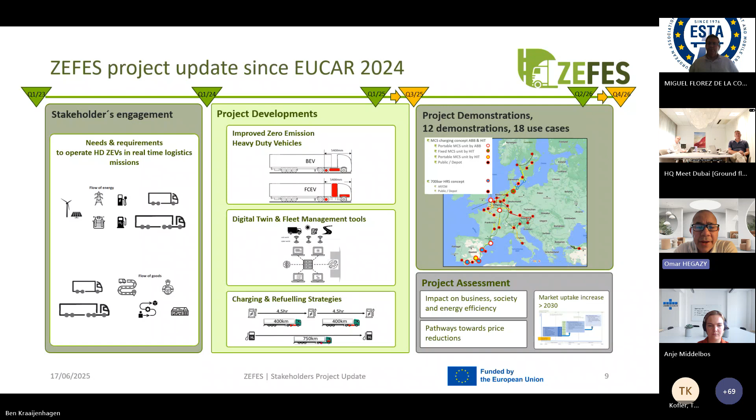If you go further, the key item of the project itself is the demonstration. As I highlighted already, we have 12 demonstrations, which will be demonstrated in 18 use cases, and maybe later we'll see more on that. That has also been shifted to Q4 26, so the end of the project. But we'll still have margin to do the analysis and evaluation of the outcomes of the demonstrations.

As outcome, as in each project, we produced a requirement specification. We successfully did that with a really nice stakeholder group, which you are attending today. We collected all the information about the logistic missions, and the needs and requirements for each use case. What are the challenges there? We also looked at mitigation, and then translated this into KPIs and design requirements and so on.

After that, in Work Package 2, we successfully did the design optimization for the modular powertrain to show the flexibility of our solution from fuel cell to battery, linked to the mission itself, where we also tackle TCO reduction based on charging locations and hydrogen refueling stations.

Also within the project, I think we are now in the commissioning phase of the megacharger, where we have 2 megacharger systems that will be provided by Hitachi Group and ABB Group. It will be highlighted later where they will be located according to the use case deployment.

We also have an HRS in Vienna, Austria, and Spain, that will be rented as a mobile unit, where we can provide 700 bar refueling at 60 grams per second. I think that would be a very nice one to shorten the time for refueling the fuel cell.

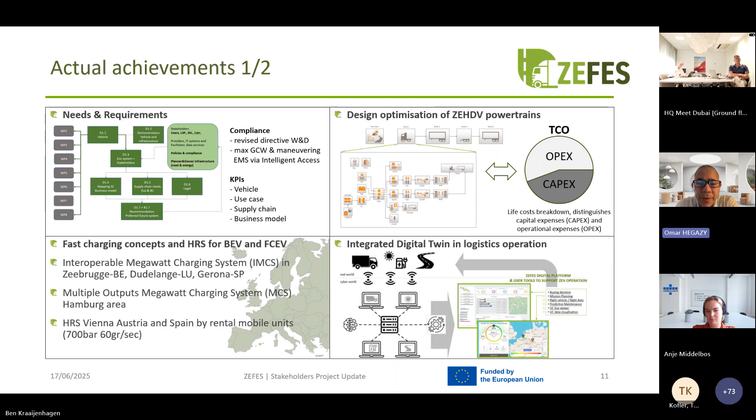Again, we also successfully developed the digital tools that will be helpful to analyze all the scenarios and use cases, reflecting back on the validation of our solution. You see here a list of the tools. The first tool is the buying decision, where we can select the best vehicle for a certain fleet operation or logistic mission. The second one is mission planning, so with this tool you are able to plan your mission itself, and to track TCO reduction, availability of chargers and so on.

The third tool is the right vehicle for the right duty, where we have the flexibility to investigate a payload of 90 or 100, and there you can also see the different weights and so on of the vehicle itself.

Dynamic correlation, which is really nice for accurate estimation of energy consumption, also tracking the charging position and refueling station. Predictive maintenance, where we have very nice cloud-based connectivity hosted by TNO that will allow us to have holistic data enabling us to plan maintenance for the vehicle itself and charging.

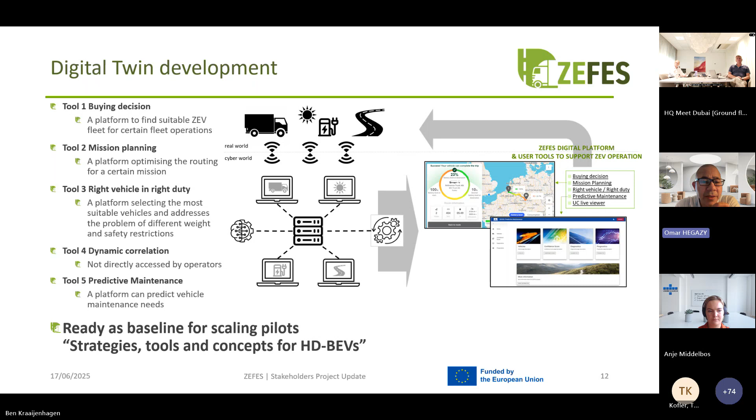Thank you. Thank you very much, Omar.

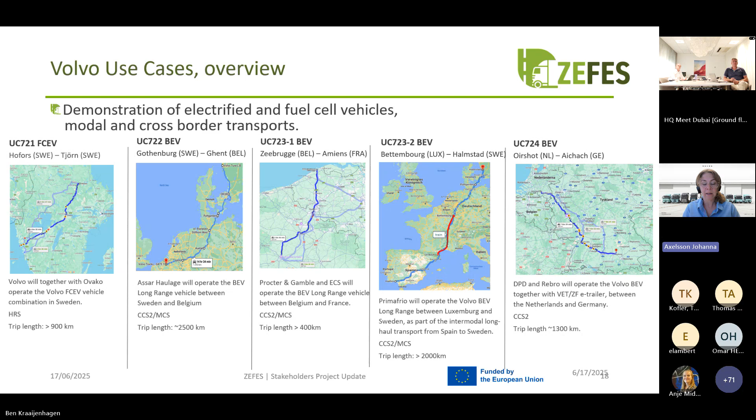But let us go into the details about the use cases and start with the battery electric vehicles first. The first use case we have is what we call Assar Haulage. It's a trip with a trip length of around 2,500 kilometers. With crossing borders, we have ferry connections in Puttgarden and Rödby. And this is a use case that we will drive from factory to factory between Sweden, Gothenburg, and Volvo in Ghent.

During our route, we will use different public charging stations, and also we will work together with Hitachi and ABB along the route with their charging stations. And then, of course, we have the factory charging stations at Ghent and Gothenburg that we will use. So it's quite a long route, and that is a challenge to really believe that we can manage this when we're starting it up.

And we will drive automotive products from factory to factory there, of course. Assar Haulage is a Volvo logistics transport company that we will use. So we will have Volvo to Volvo, you can say, in these use cases, and we will drive an FH Electric 6x2 tractor with a semi-trailer, and we will start up in the beginning of next year here.

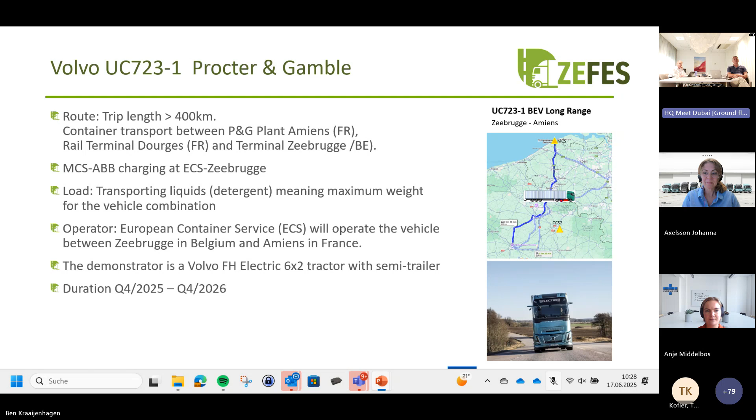Yes, I can say that from a Volvo perspective, we are looking into that, but there are some challenges with the permission. We are planning to drive that in France, if all permission is in line, and if so, that will happen in late 2026. Thank you very much, Johanna. So it refers then to the Amiens Zeebrugge use case, where we will try to have EMS2 vehicles as well in the project. Yes. Thank you very much.

Then I would like to invite Christer Thorén from Scania to guide us through the demonstrations and use cases with Scania vehicles and the partners which are involved here. Please go ahead, Christer. Yes, hello, great to have this meeting where we can summarize the status where we are. My name is Christer Thorén. I've been working at Scania for the last 23 years and started with electrification in 2011. So I've been through the complete development with electric vehicles at Scania.

And I also would like to say that this project is very important for us because we see that the main challenge of electrification of vehicles in Europe is the infrastructure. How to build up the chargers, hydrogen stations and so on at the right place, at the right power level and the right amount. So the result from this project hopefully will influence the people in Brussels who can support that rollout and speed it up.

So as a background, we participate in 4 use cases across Europe. And this is just an overview. We are up north and we are also down south in Spain. Let me go through the details on the coming slides. So we take the next slide, please.

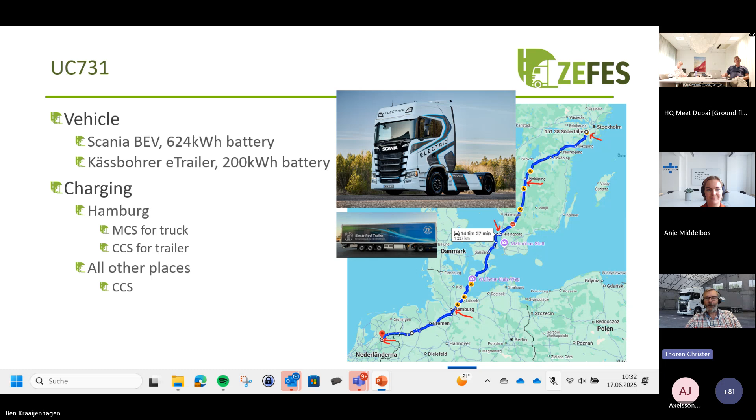Regarding the chargers, the Hamburg charger will most likely be an MCS charger supplied by the project. The other chargers are public chargers using CCS. Maybe they will have upgraded to MCS when we start this, who knows, but we plan for CCS. Next, please.

The challenge we see here is charging. I would say in Sweden and the Netherlands, the charging is good. Now the charging points are opened in the Netherlands, and we have a very good network in Sweden now, but in Denmark and Germany, we don't see that penetration of chargers. So that's a challenge, how to handle that. We handle it in Denmark by having an e-trailer, and we handle it in Germany by having a project-specific charger.

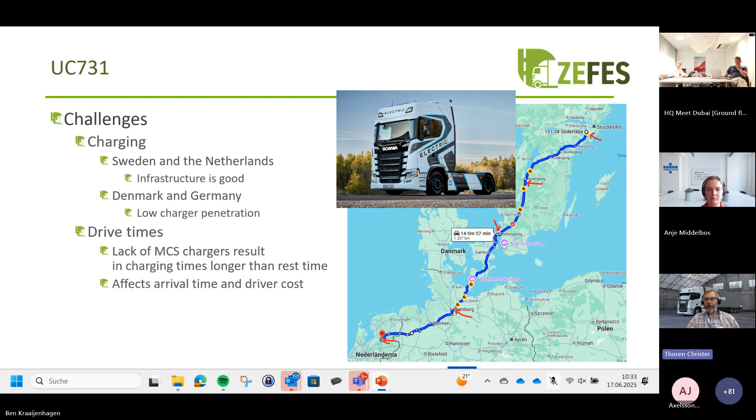And of course, the lack of charging will affect drive times. You might have standing queues, and that will also affect the arrival time and the driver cost. So, charging and infrastructure, that's the key. So we can go to the next use case.

But anyway, we do the first 5 months in Germany, and then we move this truck to Spain and continue down in Spain. In Spain, we also do a dual trailer EMS2 combination, and we hope to be able to drive from France and down south also. But if not, we have to attach it just across the border.

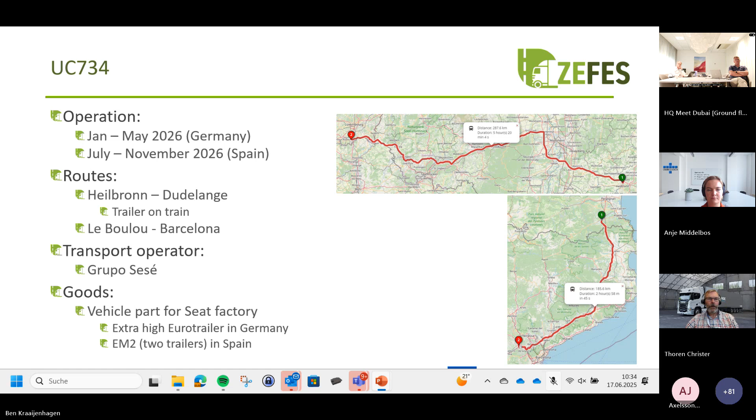Next, please. So here we have a low liner. The trailer is very high, it's a 3-meter trailer, so to be able to handle that, we have an extra low vehicle. Same battery size as before, 624 kilowatt hours.

Charging in Germany, we hoped to have it in the starting point, but it wasn't possible. But there's a charger in Frankenthal, which is a good place. So we go, I don't remember exactly, but about 50 to 100 kilometers to Frankenthal, charge it, go to Dudelange, which is in Luxembourg, where we leave the trailer to the train, and we charge there using an MCS charger from the project, and then we go back and also charge in Frankenthal on the return if needed. And that is a public one.

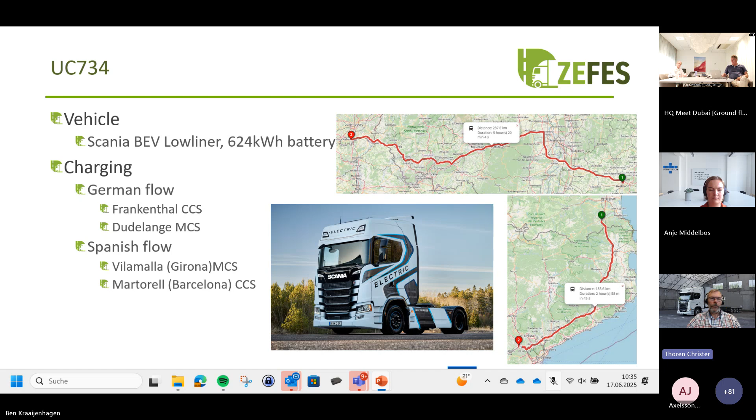And in Spain, the project will have an MCS charger in Vilamalla, close to Girona, Spain, and then in Barcelona or Martorell we'll have a public CCS charger. And so it's an end-to-end charging. And again, Frankenthal is public, so hopefully there will not be a long line there, because they work just in time, so they have to arrive in time. So we'll see how that works. We haven't checked that in detail yet.

And again, the EMS2, will we be able or be allowed to drive in France with EMS2? And if not, then as I said, we can go back to the previous, please. Yeah, so if we can't drive in France, we'll only drive in Spain, and then we have an extra truck that drives the last mile to France. So yeah, next please.

This is the use case for our fuel cell truck. Gruber Logistics are operating in the northern part of Italy. They have a center in Verona where we will place our truck, and the plan is that it drives up to Austria and passes a fuel cell station in Brenner, and this will be done first half year of next year. Next, please.

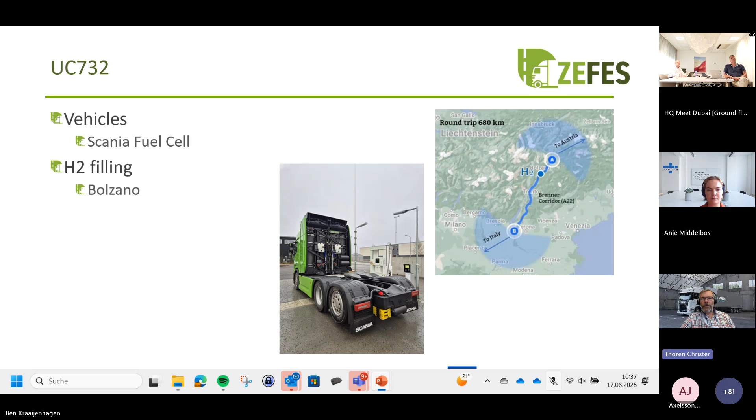So this is our fuel cell truck that we'll use there. Yeah, I can't say so much more about that. It's our regular fuel cell truck, and the filling will be done in Bolzano, which means we can drive to Bolzano, fill it there, go up in Austria and deliver goods, and then go back to Bolzano, fill it again, go down to Verona, pick up new goods, and so on. So that's the idea. And yeah, the range, depending on how far you want to go in Austria, will the range be enough? And will we actually be able to drive in Austria?

We have a length restriction in Austria that, well, not me, but our colleagues in the ZEFES project are in discussion with the authorities about, because the fuel tanks take some extra space, and the complete vehicle will be longer than normal. It will comply with the European legislation, but Austria has not approved that. So we're in discussion, to see how we're going to do in Austria.

And then the final one will be done in the second half of '26. The route is from Murcia down south of Spain and up to the same train station as we have seen before. And this operation is done by Primafrio, and they transport fruits and vegetables. Next, please. So here we will reuse the fuel cell truck from Italy, and we will come with a new BEV truck in this case. And also here Primafrio will of course use an e-reefer. They have goods that need to be cooled, and today they normally use diesel-driven cooling equipment for the trailer, but we want to shift to electric or CO2 neutral cooling. So there will be an e-reefer in this case.

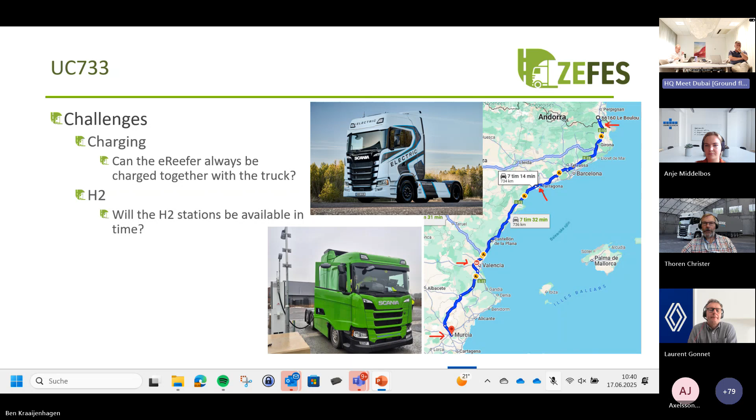Then we continue with the Renault demonstrations and the use cases. I invite now Laurent Gonnet from Renault Trucks, who is guiding us through the demonstrations from site Renault. Laurent. Thank you, Ben. Laurent Gonnet, project manager for Renault Trucks for ZEFES.

In this project, Renault Trucks is pursuing a transition toward electrification. You already know that we have in production some BEV, and with this project we'll test the extended range of our trucks. It's a new generation of trucks, and for ZEFES we'll introduce and test 2 trucks in 3 different cases. As mentioned, we'll work with our partner Michelin between their 2 plants in France. We'll run also for DPD in Belgium and Netherlands, and we'll run for our own logistic flow between Lyon and toward one of our suppliers.

The detail of the operation is in the next slide, Ben, if you want to turn it. We start with Renault and Michelin. In this case, trying to be as close as possible to true existing logistic flow. We will work between 2 plants, not really in a TEN-T corridor, but aside of that. It's national roads, sometimes highways, but very hilly road with some high elevation. For this case, you must know that in the south part of this trip, we have something like 1,000 meters elevation, which is a big challenge for typical BEV trucks.

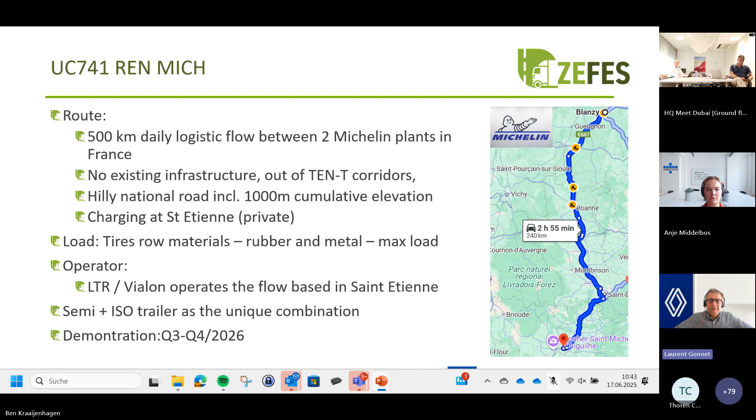In parallel to that, we have a second truck we will run in Netherlands and Belgium for DPD with a private transport company called Van Zetten. Here the trip is a T-shaped trip, mostly in the night. The truck is starting from the red point in Netherlands, going to Brussels, back to the starting point, and then moves from east to west, back and forth to complete the trip. The trip is approximately 600 kilometers. Night trip to avoid traffic jam. Not so heavy truck, still tractor plus semi convoy, nothing special there.

We can and we hope to start in Q2 next year, and then there is no big issue. It's based on public charging stations along the highways, and it's pretty flat road. So in terms of challenge, the time and the respect of the timing between warehouses is probably the most challenging aspect of this trip.

And the first truck, which will be with Michelin, will also be for our own logistic flow. We will start even with this, starting from Lyon for our own logistics from our plant, which is in Lyon, and we'll go towards the Mont Blanc tunnel to take and swap semi and going back to Lyon in a day. Here also, it's approximately 550 kilometers in a day. It's a daily trip, several rotations in a day, so we have to choose one.

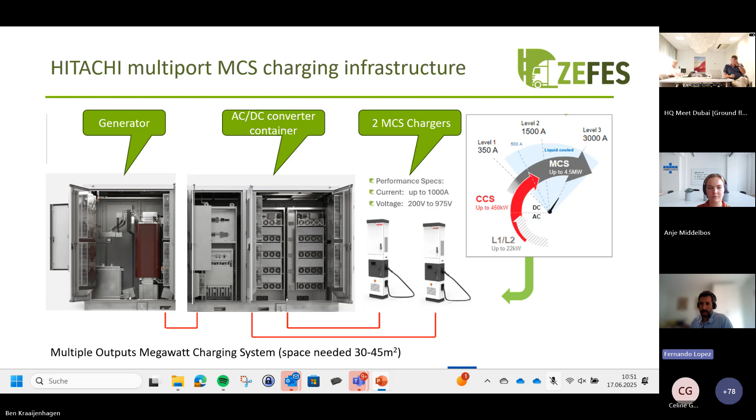We are going, as said before, with the MCS charger, and you can see on the right-hand side an overview of the different charging plugs. In this case, for ZEFES at 1000 amps, we are on the MCS part. Maybe the next slide, please. This is an overview of the power flow. So we are connecting from AC power.

The initial plan and our work in the last 18 months plus has been to get a grid connection on medium voltage, and then deliver a transformer to step down to the required input voltage for the system. However, this has been extremely complicated to manage in Hamburg for several reasons. Basically, whenever grid capacity could be available, the location was far away from the highway and didn't sustain the use case. So at the end of the day, we have been struggling and we are struggling. We have a meeting this afternoon to explore some other options, but we've been struggling to get a grid connection close to the A1 highway in Hamburg.

Some options are the use of generators. There are diverse types of generators. What we are analyzing at the moment is hydrogen, a nice option for the future, but I don't think it will work for the ZEFES use case because of the time frame. Others are more classical generators.

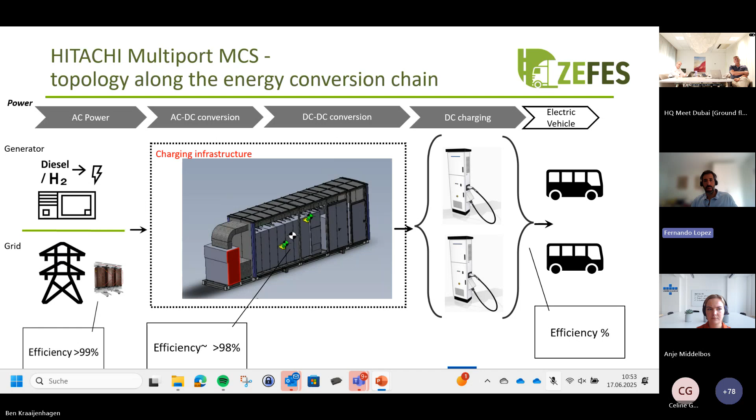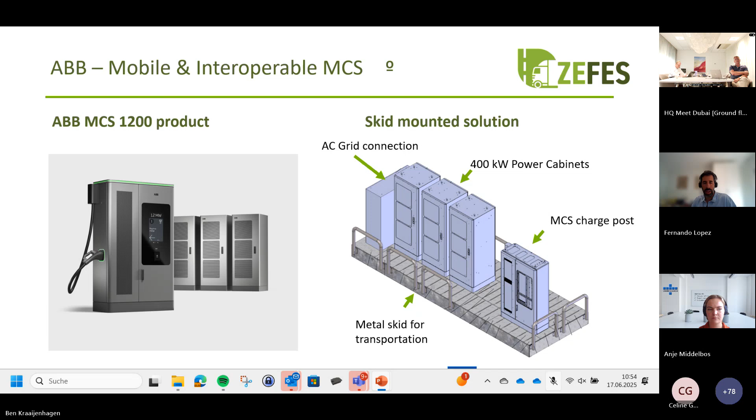Next slide, this is more of the technical characteristics. I think I have mentioned most of it. So we have the three 400 kilowatt power cabinets, the AC distribution with some protection, and then everything is installed on this frame to be able to easily transport from one side to another. And the challenge is the same.

From both Hitachi and ABB, the biggest roadblocks so far have been to get approval from grid operators, or even to get the commitment for connection to the grid with 1 megawatt. And backup solutions with battery storage and diesel generators, in the case of ABB, were also quite complicated because of the constraints from the site, plus some struggles on the procurement of the transformers.

So basically, from this power flow chain I showed before, this is the first block where we have both struggled the most so far, which is the capacity of the grid close to the use cases, to the highways. Otherwise, design and production is on track, and we are very much looking forward to seeing the equipment on site and charging.

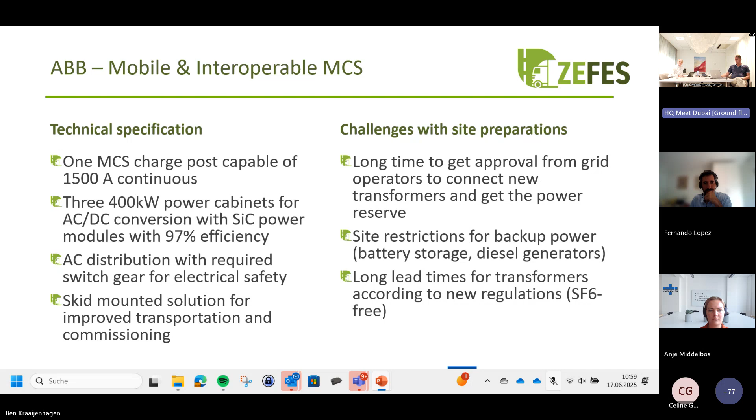So then I would like to continue with the Ford demonstrations.

How can I get rid of this bar here below? That is okay. Leave it as is.

So I will present the Ford demonstrator and the use cases.

From Ford Trucks, there will be supplied a fuel cell electric vehicle, the FCEVs. The technical progress of the vehicle is that the mechanical development and the vehicle build is done. The fuel cell is also developed for the critical functions, and the systems are now in commissioning. Ongoing is the calibration for the finalization, the functional and the durability test, and we are working very hard on the homologation and the certifications, because here we see that every fuel cell vehicle out of the project has a

certain overlength. And for those countries who are not approving the revised weight and dimension directive, we might have difficulties to have this kind of trucks in operation with a normal standard trailer, because the hydrogen tanks are behind the cab, so you need some extra length to let the vehicle have enough hydrogen on board. And then together with a standard trailer of 13.6, we are exceeding the allowed lengths.

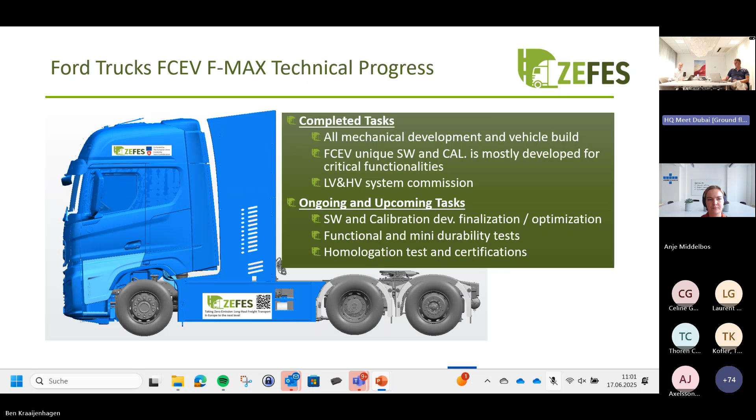We have 3 use cases in mind with the Ford vehicle, and the intention is to start in March 26. The first demonstration is that the company Gebrüder Weiss will operate the vehicle between their location in Graz up to Vienna, and we might use the corridor from Vienna into Bratislava. We have only one hydrogen station, which is at the Wien Energie location in Vienna. It is a 700 bar location, so it is fit for heavy-duty trucks.

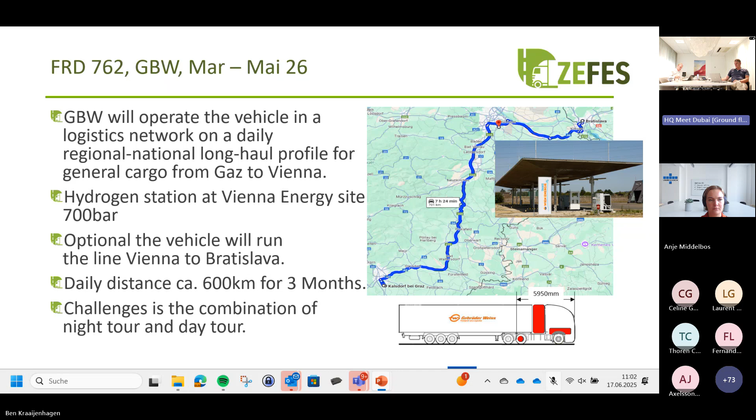So with this one hydrogen station, we need to do the full corridor from Graz to Vienna, Vienna to Bratislava, back, and then again back to Graz. It is a combination of night tour and day operation. So this vehicle will really run around the clock in those 3 months. And we do that by simple driver swapping so that the vehicle can continue its jobs during the day.

The second use case is from Gattatico close to Milan in Italy, where we have a Procter & Gamble factory plant. The truck will cross the Brenner Pass, as the Scania also will do, which Thorén already presented. And then passing Austria, Germany, we go to Crailsheim in Germany, where the other Procter & Gamble factory is. It is a long route. It's 700 kilometers, and we are transporting containers with half products between 2 factories.

Very hilly, and into Germany. It's also a long distance. It's also a busy motorway. So here is really the challenge: are we able to do this as a daily trip? We have the option of having 2 hydrogen stations. One is the Bolzano one at the Brenner, and the other one is in Giengen an der Brenz. That one is already fit for 700 bar, and the Bolzano one is in discussion, and we hope that it will be operated on time, and we are waiting for the confirmation from the people at this location.

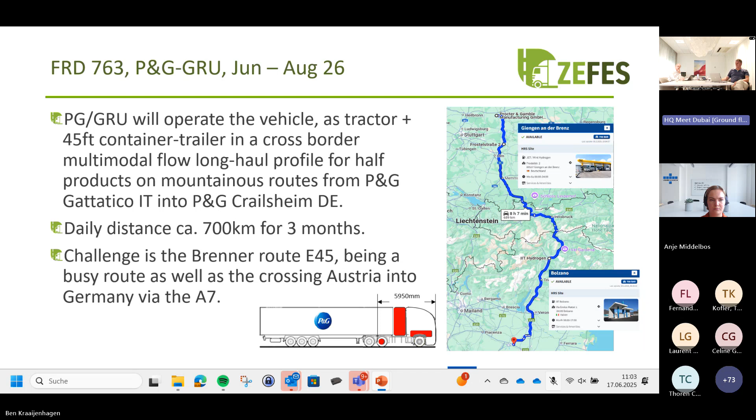Then finally, the vehicle will run in Turkey between the Ford plant at the other side of Istanbul, and it will drive assembly parts for the vehicle plant to the docks in the Istanbul harbor. It's also a daily route of about 500 kilometers. And here, of course, we have to deal with climate conditions and the intense use of the route. And also here you have the challenge, can we really fulfill this with only 1 hydrogen station? So also 3 very challenging use cases with the fuel cell truck. So far, the fuel cell vehicles from Ford.

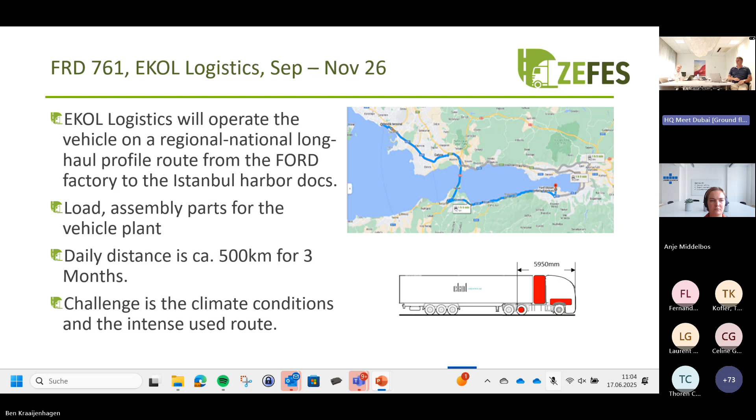Anje, is there any question? Otherwise, I continue. There's no questions in the chat.

Okay. Then we have the last demonstration, which is charging on rail. Johanna and Christer already mentioned that we are transporting trailers by train between Le Boulou, the south of France, and the CFL intermodal terminal in Bettembourg, Luxembourg. We have a very good collaboration and cooperation with CFL Multimodal and UEC. And together with the rail people, we are really diving in this topic, because either it's the trailer or in the future also the complete truck, which can go on a rail wagon.

It is, of course, then the goal to have the batteries fully loaded when the vehicle arrives at the destination, so that the truck can pick up the trailer, and then both the truck and the trailer are having a fully loaded battery. The intention is that somewhere in Q3 this year, we will do a physical test of 3 trailer types. First of all the e-reefer, that's a Schmitz Cargobull semi-trailer with an

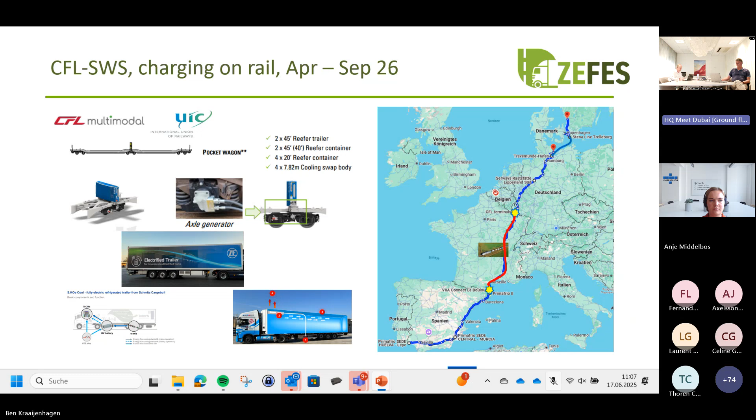And the dimensions of such rail wagons are mentioned in this overview. So by that, we really save time in charging the trailers. And in the future, you can, of course, also extend it if you have a roll-on, roll-off of the complete vehicles. So far, the demonstrations and the use cases.

We are now coming to the Q&A of our session. We are very nicely in time. First of all, I would like to give the word to Anje, and then we can start the Q&A. Yes, thank you so much, Ben.

Yes, so as most of you know, from the ZEFES project, we have started at the beginning of the project with organizing stakeholder symposia. This is an opportunity for us to connect with you, with the external stakeholders, to give an update on the project, to showcase where we are, what are the recent developments, but also to discuss with you the challenges that we are facing in the project and to see your perspectives on that as well.

We've so far had 2 stakeholder symposia. The first one was organized by IDIADA in Spain, and the second one last year, October, was hosted by Volvo in Gothenburg. And we have the opportunity now to have the 3rd stakeholder symposium organized by CFL Multimodal in Luxembourg. We have extended a little bit the date of this symposium because normally we organize it in October.

However, due to the developments within the project, we have decided to host the meeting in February because at that time, on the 25th of February, we will be able to showcase several things to you in live demonstrations. So we will have vehicles on site, we will have an HRS station, we will have a megawatt charging system, and we will have the train connection there as well. So we will be able to showcase to you the different parts of the project that are all coming together. The date will be the 25th of February.